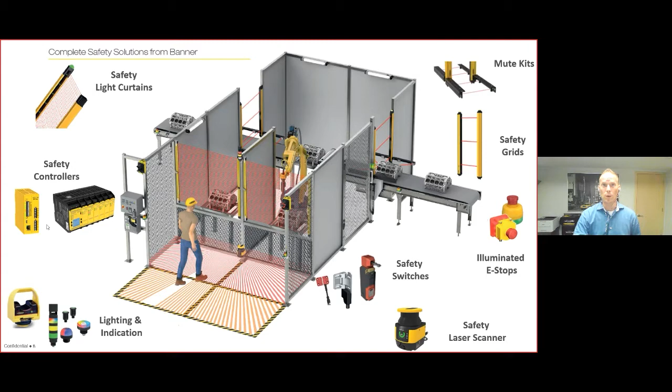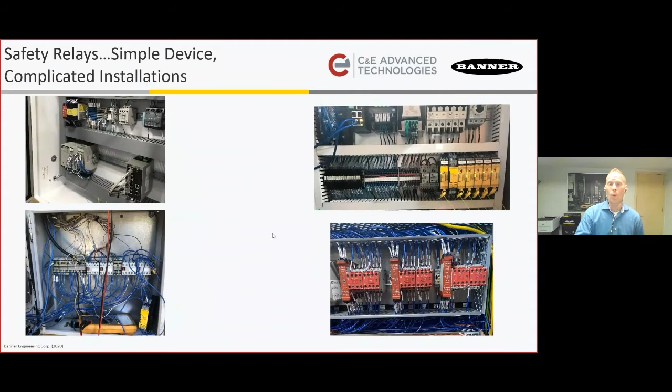So before jumping into ISD, when I was out doing research, I noticed something in the cabinet that was pretty apparent. There's a lot of relays used in different ways. You can see in some cases there's a lot of wiring. It's kind of a mess. You're using multiple relays with wiring, and in this case, lots of relays, contactors, and a significant wiring mess. And there weren't safety controllers in these applications. And I had to say, okay, why aren't we able to get in there and sell an expandable safety controller?

You know, Banner has been developing and manufacturing their own safety controllers for well over a decade. This is our second generation version, the XS26. It's a great product. I went out, talked to our customers, said, hey, what's your feedback on the XS26? What do you like? What don't you like? And overall, across the board, what they really love with this product is the PC software.

First of all, it's free. It's easy to use and learn. And actually later on in this presentation, we're gonna have Shane show you that. It's so easy that even a salesperson can do it, right, Shane?

So we'll go through that. It's flexible as well. So overall in this system, you can have up to 154 safe inputs, 64 safe outputs. So it's super flexible, and it's also smart. In this day and age, having a controller that can speak to the PLC, and we have the most common protocols, Ethernet IP, PROFINET, Modbus, is really important.

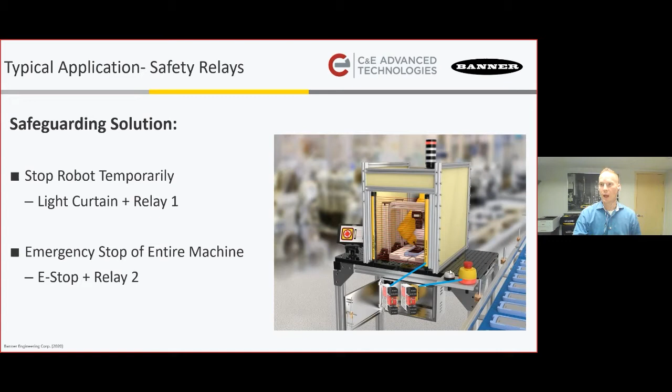So they love that. So then I said, okay, well, when I look over at your simple machines, I notice you're not using the XS26, and why is that? And when we looked at it, we said, hey, in this cell here, there's a robot, there's a light curtain that is here to stop the robot when somebody's hand is maybe adding material or removing material from the machine. And that's hooked up to a safety relay that's designed for light curtains. And then there's also an EStop, and it's connected to the second relay. And that second relay is going to basically stop the entire machine if something bad happens.

So then you ask the question, well, why didn't you use a safety controller? And the simple answer was, well, when I look at 2 safe relays, and this is list price, right? We're looking at $300 to $500. When you get into an expandable safety controller, the cost just didn't make sense.

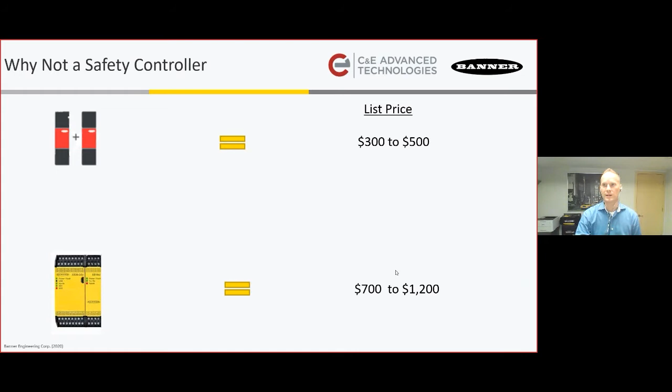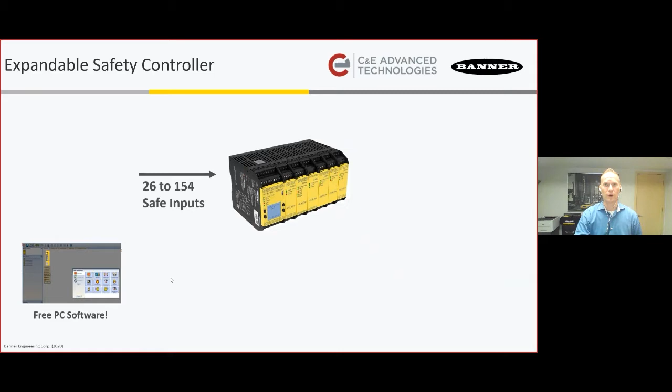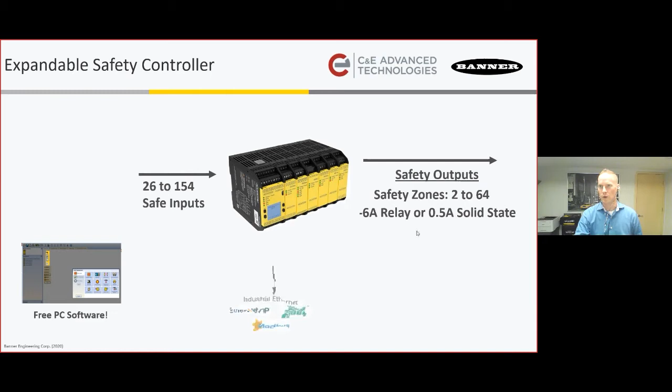So I brought that back to our team and said, hey, we learned people love our XS26, the free software. It's easy to use. They love that you have all these safe inputs. You can configure the safety outputs. There's a ton of safety zones. You got 6 amp relays, half amp. Actually, most people buy our 6 amp relay module, and they love this. But we need something that can fit in between.

Because I showed the team, looks like I clicked too many times here. So on one end of the spectrum, you have safety relays. And the way they're set up is they are built with fixed logic. And what I mean by that is, like in that last example, there's an EStop relay, and it has its own logic that works with EStops. And then we have another relay for the light curtain, which is a different relay that has its own logic and works with that type of device.

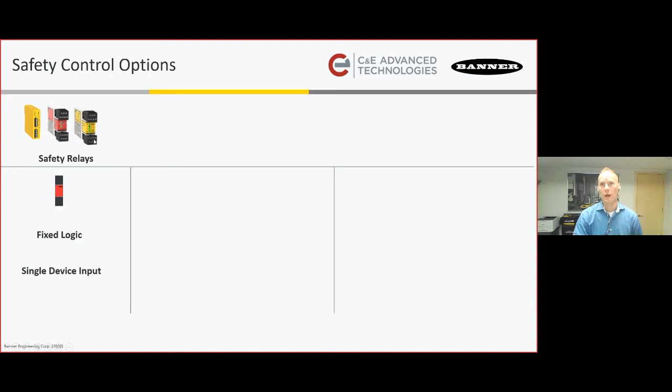And there's two-hand control relays and all that. So you got to pick the appropriate relay and also the function that you want it to do and stock that and use that. On the other end of the spectrum, you got expandable safety controllers. You can configure the logic, but really the price starts to make sense when you get to like 3 or 4 safety relays, when they start really adopting expandable controllers. And that's why we invented this product called the SC10. And this is a hybrid.

It's a safety controller, so all the cool stuff you get over here, but we built in 2 independent 6 amp safety relays. So we took 2 of these things, we stuck them in the right side of this box. So the top one here, safety zone 1, 6 amp relay. Bottom one here is a separate safety zone 6 amp relay. And you have 10 inputs that are configured with the same great software you get over here on a PC, and it has industrial Ethernet. So we made this thing smart, Industry 4.0.

Hey, John. Yeah. What's the rough size of that SC10 width-wise? It's the size of 2 standard safety relays. So it fits right in that same place as 2 standard safety relays. Great question.

So Yancey, you're paying attention too. This is great.

So the SC10, again, uses that free PC software. It has 10 inputs, and it's 2 safety zone outputs. Safety zone 1, 6 amp relay. It has 3 normally open sets of contacts. Safety zone 2 is a separate, independently controlled 6 amp relay with 3 normally open sets of contacts. It has industrial Ethernet that speaks the most common protocols: Ethernet IP for Allen Bradley, PROFINET for Siemens, and Modbus TCP for a whole host of other PLCs.

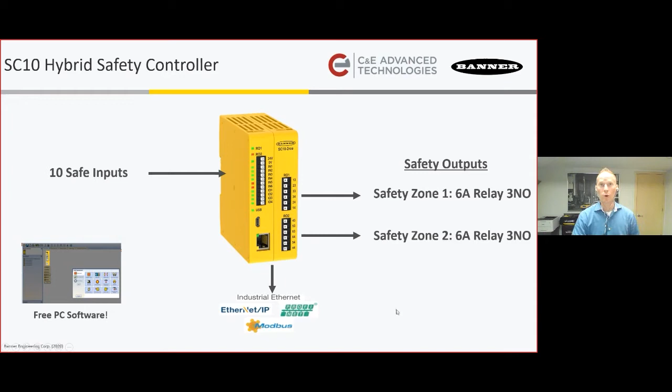Now, the other piece of feedback we heard in research was about relays. What they really love about them is they're very easy to set up, and when they need to be swapped out, you don't have to bring a PC out for that either. With a safety controller, the concern of a controls engineer was, hey, when I have to set up this machine, I'll have to drag out my PC to set it up. Or when it gets installed, I'm going to get a call at 3 a.m. from the maintenance worker saying, hey, I got to swap this thing out. How do I program it?

So I brought that back to the engineering team and said, how do we fix this? And what we did is, both of these controllers have memory built into them, but we made this thing called an XM3. It's a removable memory device that you can store the safety configuration and the passwords on. This is password protected, right? You don't want people going in a safety program and changing things. And also the network settings. Whenever it gets its final network settings, the SC10 will push that into this device.

So what's really cool about that is when you go to build your machine, you can stock one of these things, the SC10. You don't have to have 12 different types of relays for all your machines. You got one SC10, and then you can create a bunch of these XM3s with the part number, put it in stock, and you never have to go out as a controls engineer to the line and program again. The panel builder sticks it in, powers it up, boom. It has what it needs. It's ready to run. And you can actually leave this device in the SC10; it'll work through vibration and everything. We tested it.

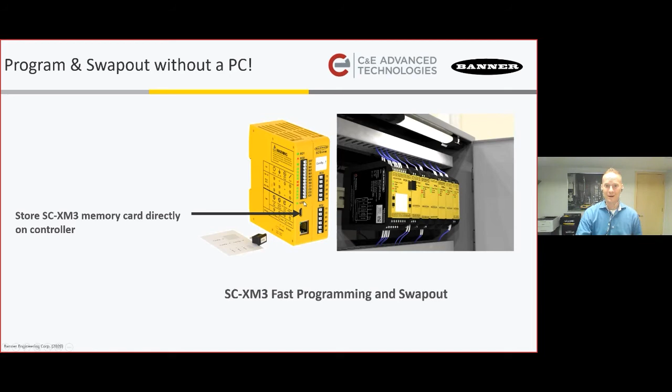So we developed this product, the SC10. We introduced this last year, and we went back out to the same customer and said, okay, here's what we can do now. Instead of those two safety relays, you can replace it with the SC10, same size. It's a 45 millimeter safety controller. For the light curtain, you can plug the light curtain into 2 inputs on the SC10. Again, you have 10, right? That is then mapped to safety zone 1, that first 6 amp relay. And then for the EStop, depending on how you're hooking it up, you got 3 to 4 inputs, and that goes to safety zone 2.

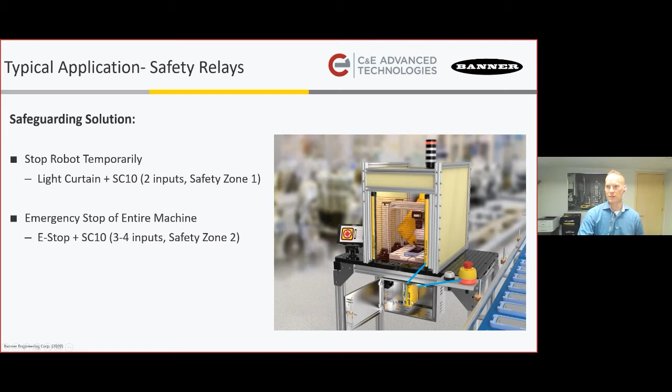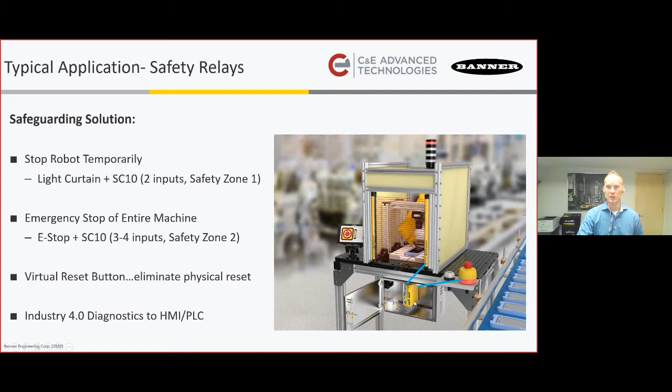And you still have other inputs available if you want to control the light on here, because you can actually turn these inputs to outputs to control lights. You can do a lot of other stuff with the available inputs. The other thing is you notice there's a button on this machine that they're using for the reset. Once an EStop is pressed and you rearm it, you've got to have another means of resetting that system. You can replace this physical button and do it from the touchscreen HMI with a virtual reset to the SC10, saving additional cost. And then also Industry 4.0, we got diagnostics to the HMI and PLC because this thing can speak the language of a PLC.

So when you look at the overall value that the SC10 delivers, it has a significant cost savings even on the simple machines, $150 per machine, and this doesn't take into account the wiring savings. If you're doing diagnostics, wiring can be quite a challenge, even on a simple system. And also the simplified inventory: you can use the same controller across all your machines and not have to stock all these different types of relays.

Now, when you go into a little more complex machine, in this case a case erector, here you have 2 light curtains: a light curtain on the input and a light curtain on the output. You've got a bunch of EStops and door switches. In this case, there's one hazard, inside the machine. If a light curtain is tripped when it shouldn't be, or if a door's open, the hazard in here will stop. So that's safety zone 1. And then you got EStops in case something bad happens you didn't expect. You press that, that's safety zone 2.

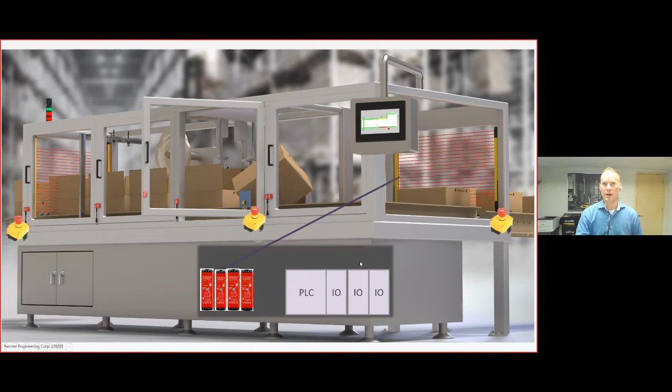Well, on a traditional system, that's going to require 4 safety relays. The reason for that is I need a relay for each light curtain, so the light curtain on the exit and the entry.

Because the EStop has its own safety zone, it needs its own relay. And all the door switches need their own relay as well. Now you also notice in this case, they've run wires home run from each device back to the panel. And the reason they're doing that, if you look up here on the HMI, is they're showing the status of each of the EStops and each of the doors.

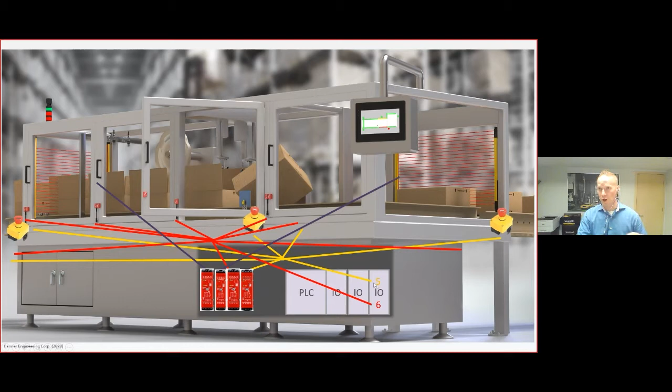And the way you do that is each device has their safety wires that go into the safety relay, but they also have auxiliary wires. And you can hook those auxiliary wires up to the I/O card on a PLC. So I got 5 EStops, all 5 auxiliary wires for each of those EStops go into 5 I/O here in the PLC. Same deal for the 6 door switches. And then the control engineer doing the programming for the PLC has to map the auxiliary inputs from the I/O card to the PLC to the HMI, and you get this cool experience. So that's kind of what's going on here.

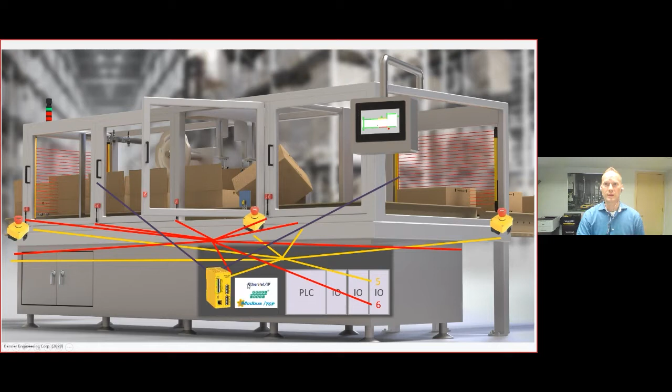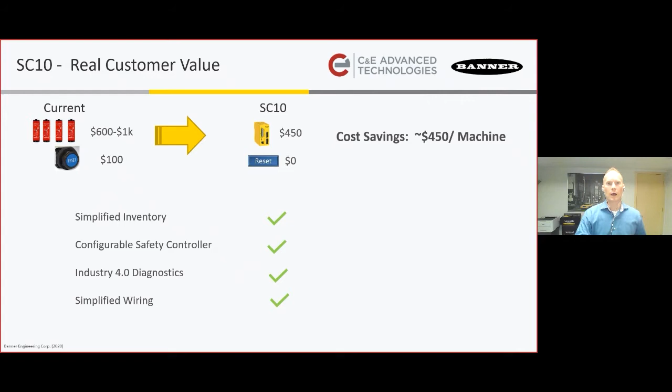With the SC10, we can drop all 4 of those relays, replace it with something half the size, save a lot of money, and also add Industry 4.0 diagnostics over EtherNet/IP, PROFINET, and Modbus. So there's a huge advantage just with the SC10 on this machine. And that advantage you'll see here. We're just replacing more relays compared to the previous example. So there's even more savings and better utilization of inventory. It has all the same advantages, just more money saved, less relays.

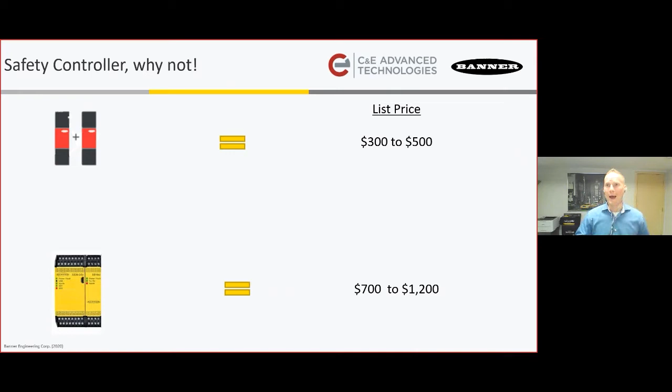So with the SC10, we went back and talked to these customers, said, safety controller now, why not? And really what they said is, I totally agree, because with this system, we have a list price on the SC10 at $450. So it's positioned where for most machines that are using 2 safety relays, there really isn't a reason to use relays again. This thing can replace all that, simplify your life, make changes a lot easier, and give you an Industry 4.0 diagnostic solution. And this has been just a game changer across the industry.

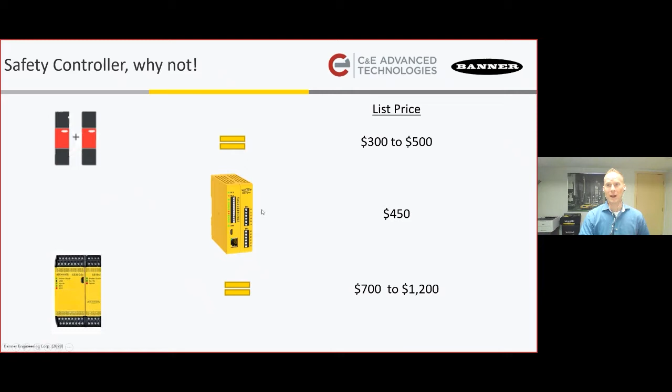So in those same discussions, we noticed the wiring, all those wires there. It's like, wow, that seems like an opportunity that we can help innovate and make that easier, because really what the customer wants is to know what EStop was pressed, what door was open, so they can reduce downtime, right? That's the whole purpose of this.

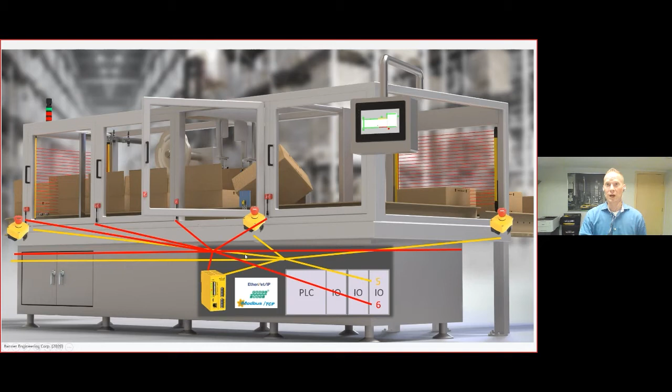But the challenge they have, and I talked to a number of machine builders, we'd be in the lobby waiting for the controls engineer, and he's troubleshooting this exact issue, wiring. All these wires going back, trying to figure out why on the screen, when I press this EStop, that one's turning on. Well, I got it hooked up in the wrong spot. That can waste hours, days. Sometimes, if they have a lot of doors, that can be weeks. And that can delay shipping on a machine. So let's look into this and figure out how we can fix it.

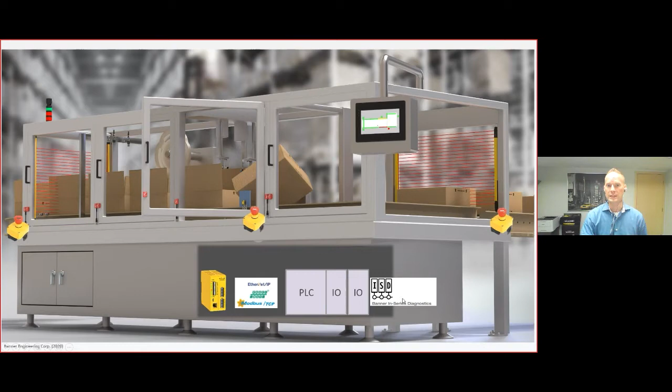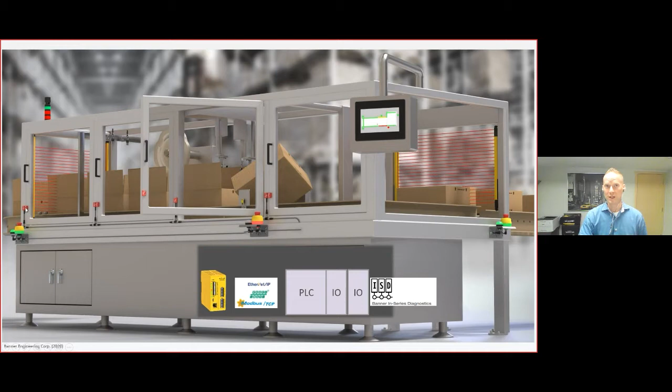So we have a solution now with in-series diagnostics that'll clean up that wiring mess. It'll also eliminate an I/O card in the PLC, or multiple if you have a lot of doors. And we're doing that with this feature called Banner's in-series diagnostics, or ISD. The way this works is we have Banner devices with this diagnostic protocol built into them, and they speak to the SC10 and directly to the PLC.

So for all the door switches, you simply connect them, if you're looking at my video, with this simple T connector. 4-pin cables connect to it to connect each device. There's nothing special about the cables. We have great cables, but nothing special about them. 4-pin cables connect the T connectors together. 2 of those 4 pins go into the SC10, and the other 2 go to power. You can have up to 32 doors on this chain. In this case, they have 6.

The EStops, starting in about a month, will also have ISD built into them. So you can do the same thing. That same T connector connects to the EStop, 4-pin cables connect all the EStops back into 2 additional inputs on the SC10. The other 2 go to power. And all this information that you get up here, we just send over either Ethernet IP, PROFINET, or Modbus to the PLC. You don't have to go in and configure all this stuff. And we even made that setup really easy. I'll talk about that a little bit more.

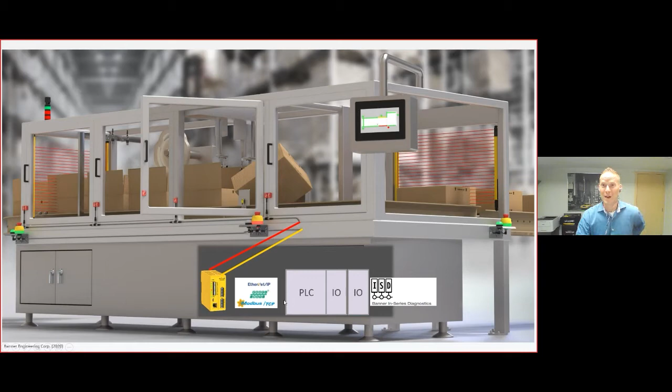So when you get down to this system, now we can even drop an I/O card, so there's additional savings. What's not on here in the cost savings is the wiring. That's a big deal. That's going to save a lot of cost, a lot of time troubleshooting, get more machines out the door.

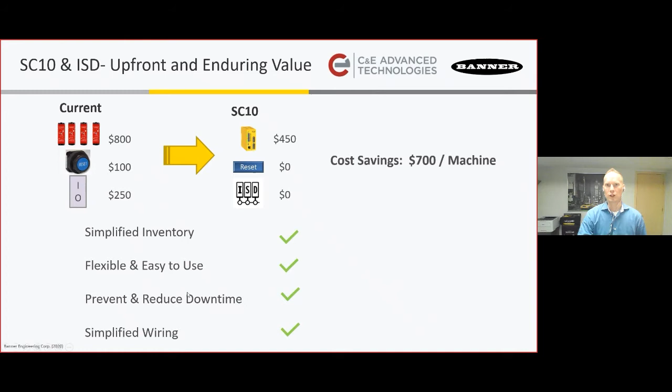The other thing I didn't mention, so we can reduce downtime. We tell you what device is pressed, where it's located, preventing downtime. There's no one else that can do this on the market, and with ISD now you can. And what I mean by that is we can send an alert to let the maintenance person know that they need to go and adjust something before you have downtime. And I'll show you what that means here in a second. But this is really a game changer.

And really, simply put, what's going on here is these devices, the RFID door switches and the illuminated EStops, have this protocol ISD built into them. They speak to the SC10. It does all the hard work and then makes it very easy for the PLC and HMI to understand what's going on with the system.

Hey, John. Yeah. I don't know if in your live demo you're going to show, but another thing, prior to ISD, our illuminated push buttons were a great indicator of which push button was mashed as well. So that may be a good point to bring up to the audience. Yeah, so you're talking about the current illuminated EStops? Yes. When they're in series without programming them, they're all, say, a steady yellow. When one's mashed, the one that's mashed is a flashing red. The others are steady red. Absolutely, yeah. We'll show that in the demo. I think I have a slide here that'll show that exact thing.

So that's exactly it. And Nancy, I get so excited about ISD, I forget about the local diagnostics that you get with this thing. But yeah, when these things are connected together in series, the device pressed will flash red. So you can locally see what's going on. And then on the HMI, even before you have to go do that, the HMI is going to show you where it is, what it is, and then you can quickly get to that spot on the machine, figure out what happened, and get that machine back up and running. That's a very, very good point.

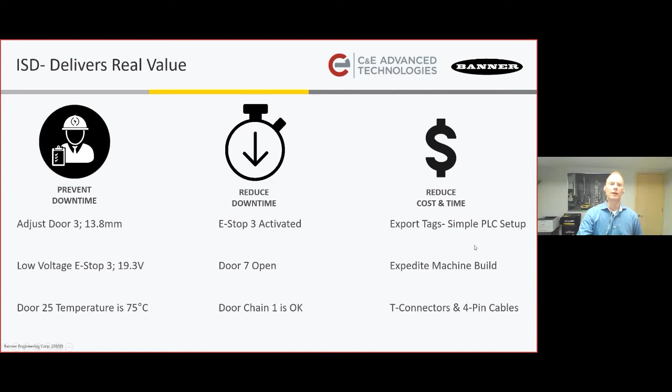Reducing cost and time. We already talked about the T connectors and 4-pin cables. That's a substantial savings. Expediting the machine build, no longer having to deal with all the wires. But when we show this to controls engineers, they say, yeah, that's cool, but how do I get all the tags set up? That's going to be a lot of work. Well, we have a solution for that as well, and we'll show you what that looks like when Shane goes through his demo. Shane's got this thing; he's going to knock it out of the park.

And again, it's a sales guy, right?

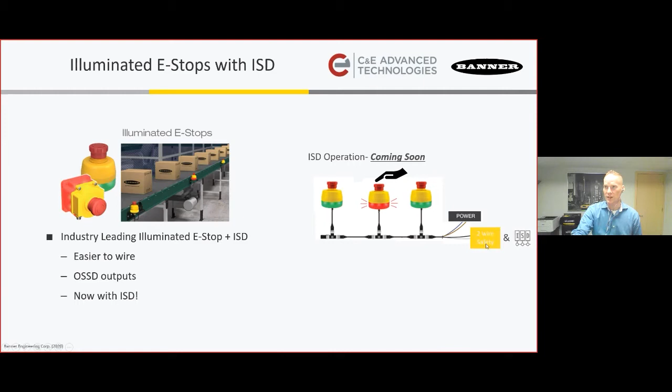And the way that works, and here's my terrible animation, is if I press this one in the middle, it's going to flash red. And in this case, the customer's using green to indicate it's armed, right? So you can locally see what's going on with a flashing red. You know that the other ones are powered or good to go. And it's only 4 wires. Power goes to the system over 2, and then these are OSSD outputs, just like a light curtain. Highest level of safety, goes over 2 wires into the SC10 for safety and this ISD diagnostic message.

So in a system, and I show this isn't really a typical way that you hook these things up, but I show this on purpose. We can get up to 64 ISD devices into an SC10. You think about that, a $450 list price product can have 64 ISD devices hooked up to it, and it still has 6 additional inputs available for other stuff. I mean, that's the most densely populated controller on the market.

And the way that this works is you have 2 separate safety zones, or ISD chains. Each chain can have up to 32 devices, and you can mix and match EStops and RFID switches if you'd like. In the example I showed before, you're more than likely going to have a chain of all EStops and all RFID door switches. And the reason for that is the way that the ISD works is you're daisy chaining devices together. It's like cascading light curtains.

So the OSSDs from this one go into that one. And if that one is not okay, it's going to tell the rest of the chain to turn off. So the OSSDs for the entire chain will be off if any one device is off. Now, ISD tells you where that issue is so you can quickly address it, or it alerts you when there's something that may cause an issue so you can address that and prevent downtime.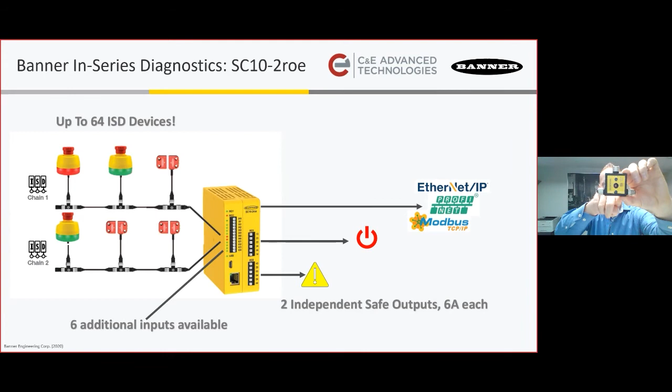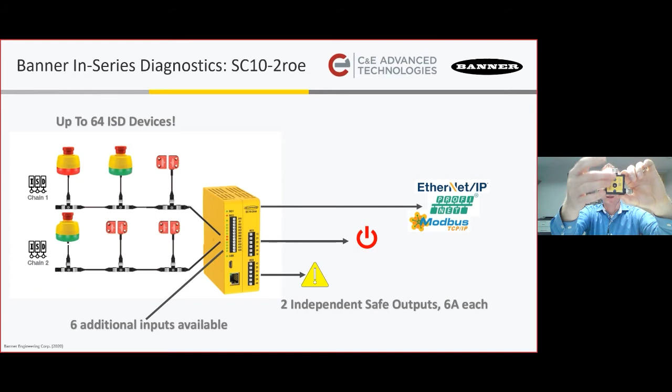What you can do with it is hook up 2 sets of normally closed dry contacts into the input of it. So an example of that would be a panel mounted EStop or a mechanical switch. It goes into here. And then this device turns it into OSSD outputs to add it to the chain. So you get the highest level of safety. It self-checks, does all that fun stuff. And it gives you the diagnostic status over the ISD chain. So you will, at the end of this year, have another option. And you'll see in the demo, it has some lights that turn on and off to tell you what's going on. It's a really cool system.

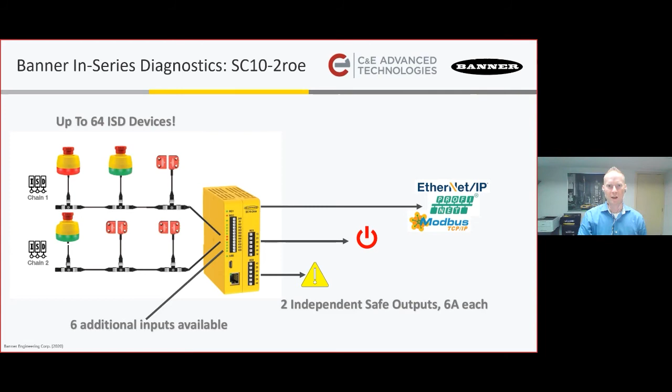All right, so I'll show another bigger view of that in the demo of that feature, in case my video isn't all that large for you to see.

Now this is how a system's constructed. It's really simple. You start out with the termination plug. All it does is it runs 24 volts into the first device, and then it's T connectors that connect the devices, 4-pin cables between devices, and 2 pins go to the SC10, 2 go to power.

Now we also have devices that allow for a local reset. So if you want to have a reset button wired in here, you can do that. Same goes for the EStop. But really, this is the most typical way to hook it up. You've got a termination plug, T connectors, 4-pin cables, and land them back to the SC10.

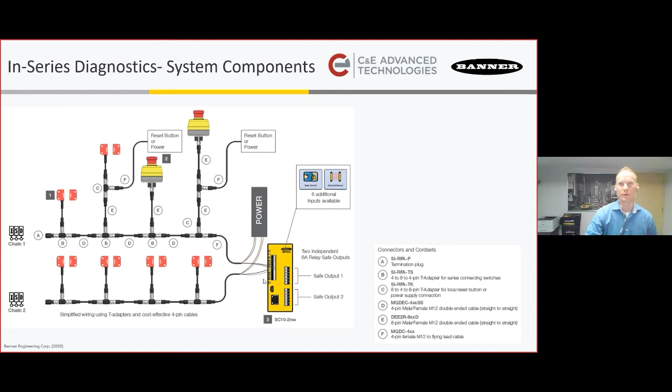Now, a question that will also come up is, how many devices, how long of a cable run can I have? Because obviously, you run into challenges with power. Well, what's really neat about this system is the only limitations that we have are 32 devices per chain. I think I said that a few times, right? But it's 32 devices, and there's like a 30 meter limit between here and here, but that's very unlikely to see, right? Other than that, there's no cable restriction.

All you do is you add power where you need to in the chain. And with ISD, it'll tell you where. So when I hook up all these devices, they wouldn't really do this in this view of devices, but what you'd be able to do is you can either add power to replace the termination plug, or you grab a T connector and you add power somewhere in the chain, and ISD will tell you where. Really cool.

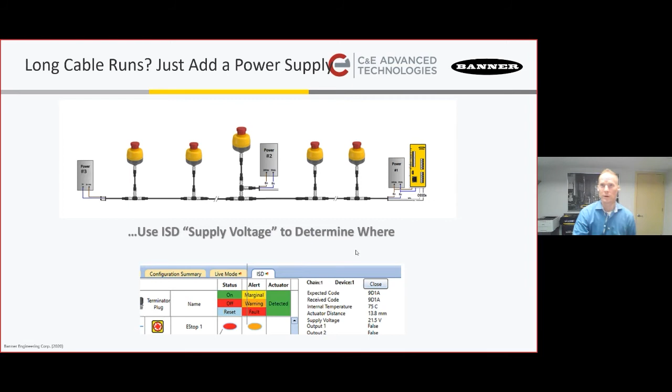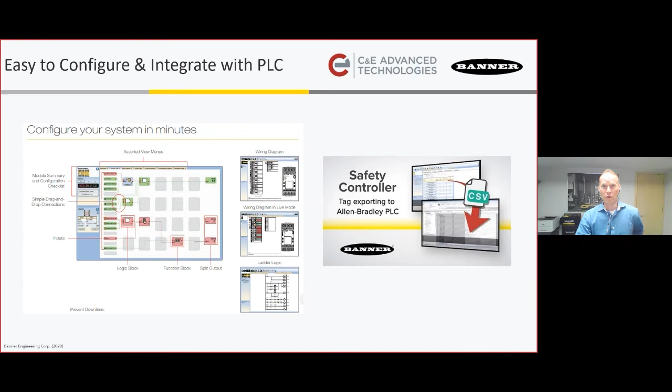And then as far as the system, it has a very simple user interface, and Shane's gonna knock your socks off with this demo, right? It's gonna be amazing. And then we also have this export tag feature. So with that, I'm gonna switch over to a software demo.

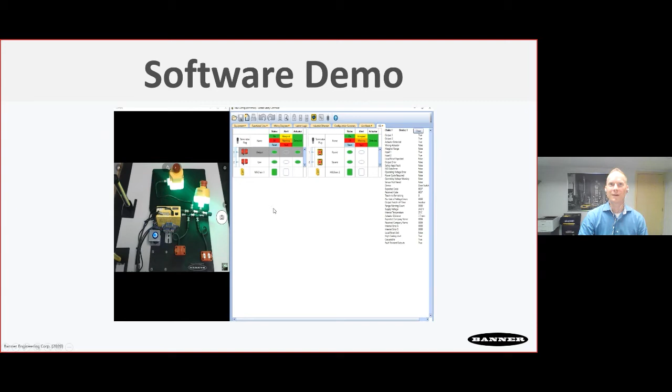Unless Yancey, you had any other questions you wanted to pop in while I'm doing this quick transition. I'll take that as a no. All right. Sorry, my mute button disappeared on me, but no, there's no questions right now. We're good. All right, great.

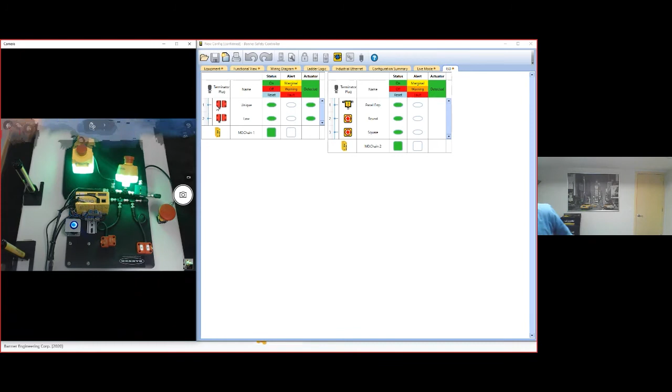In this first chain, like you see up on the screen, we have two RFID door switches. Door switch 1 and door switch 2. It's connected with a termination plug, T connectors, and a 4-pin cable. 2 wires go into the SC10. Over here on chain number 2, I'm gonna do a close up. We'll see how this blows up.

Right, so this is a prototype with a handmade label. This is what I got from engineering to do this, but it's a little sneak peek into the future, right? So this is the standard T connector you hook up to ISD devices. This is the ISD connector we were talking about earlier. I've got a prototype down here that's hooked to this panel mounted EStop. Okay, so that's device 1. You got the termination plug that goes into it.

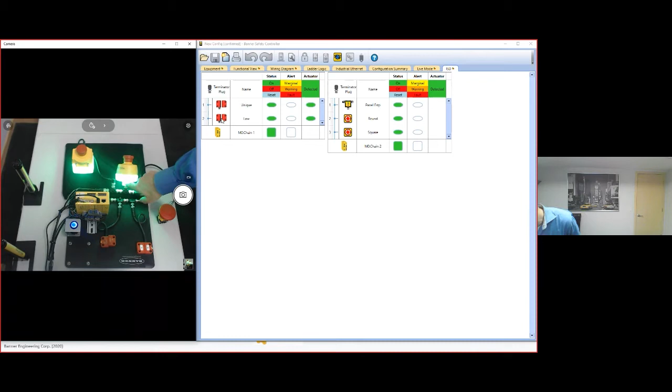Then I've got two illuminated EStops, because we sell this in a 30 millimeter round, so you can put a 30 millimeter hole in your panel, drop this thing in, hook it up. We have brackets and stuff too. Or you can do a flush mount design where this thing just mounts right to the machine. There's 4 holes for it. Now, if there is a need on our round, we have a wash down cover as well that you simply add over the top of the device and you can spray away, clean it up.

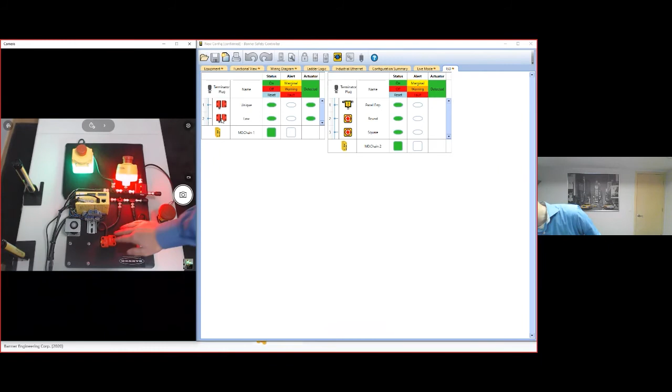It's all good. So the way the system works, you watch kind of both the screen and the video. It's going to tell you when a device is pressed, if a door is open, and that gets sent. You'll see here I've got this round EStop pressed. The OSSDs are off for that system. Over here, chain 1 is also off because that door is open.

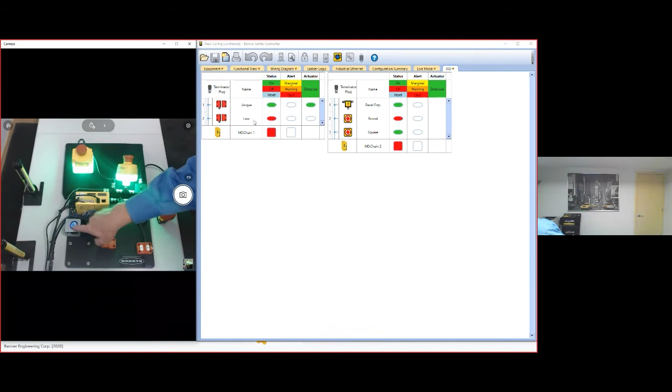Now I mentioned you also have, and I can go and remove my reset. In this case, I'm doing a hardwired reset. We're turning the light on and off on the SC10. It's a pretty cool system. But here, the other thing I mentioned is that we have the ability to prevent downtime, and with the unique door switch, I'm going to put this here out to.

So with our unique door switch, what it's going to tell you is that it's in this marginal range. So the OSSDs are on. That means everything safety-wise, it's like, hey, keep running, everything's good. But you're going to send an alert to the PLC, the SC10 will say, hey, go check out door 1. And then the PLC can say, okay, great. Hey, door 1, tell me what's going on.

And on door 1, it'll say, look at this. I'm at 14 millimeters. I can tell you that 13.8, 14 millimeters, right? So then it can also tell you the voltage level, 24.2 volts. It'll tell you the temperature. And then the other thing you'll see, it'll even tell you the actuator code.

And now where this is really cool, so on the uniquely coded one, this one's expecting to see the 8E37, and it sees that, and it's great, right? So uniquely coded, that means you train the sensor to only recognize that actuator. Each RFID code from Banner has a unique identifier in it, right? So the uniquely coded, you train it, boom, it's the only one that it'll use.

Now we also have a low coded sensor. So I'm going to show you that one because what you can do with ISD data that's pretty unique is that for this low coded, it's expected code. This it says 1, 2, 3, 4. It'll take anything. It doesn't care. So as long as it's a Banner RFID actuator. So this one right now sees ACEB.

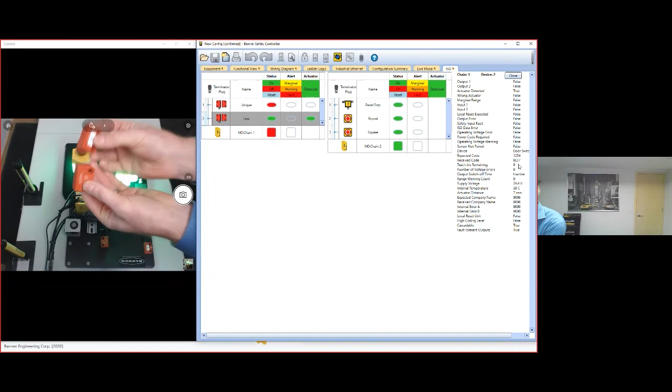Maybe I have an application where, from a process standpoint, I want to know what tool is in the machine. I can do that. So I add the tool in, I see it's the right one with my low-coded sensor. Then on that same chain, I've got the safety guard that I uniquely coded because I don't want people tampering with it, right? And all that goes back over the same two wires.

So I can get process data from the low-coded to make sure it's the right tool to run so it doesn't damage the machine. And then for the other one, I can have safety. I can hook EStops to it. I can hook whatever I want, up to 32 things. So that's a really powerful use of the system.

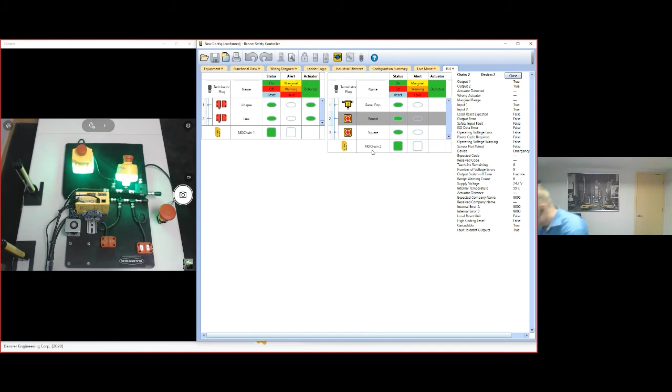Now for the EStops in particular, I mentioned the voltage. In this case, my voltage is great. I got short cable runs and a power supply that's hooked right up to it. But anyways, it'll tell you the voltage level. But now for troubleshooting, if somebody forgot, and this has happened even in some of our earlier tests, someone forgot to put the termination plug into the system. Well, this could be buried in the machine.

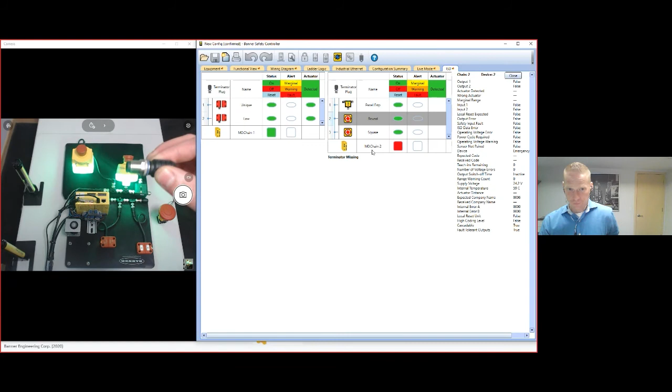And this could either be when you're doing the initial build, or when the machine goes out to the customer, and someone gets smart, maybe they watch an ISD presentation by me or something, they figure out I can take this thing out and I go on break. Well, you can quickly identify that on the HMI because you see on the screen terminator missing. And we actually have a bunch of info in this system to tell you what's going on.

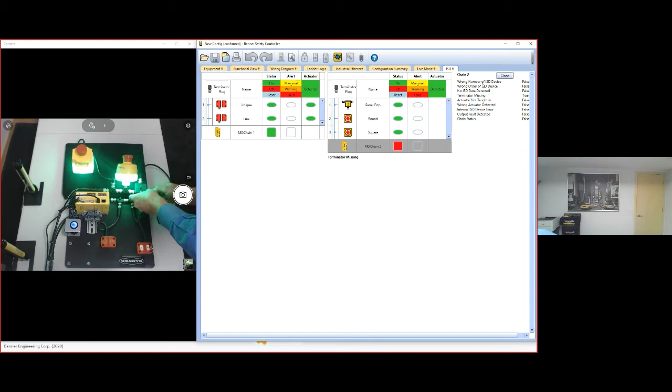So you can have the wrong number of ISD devices where that's important. Think about somebody not only trying to go on break, but let's say one of the doors in the system, they're like, that's slowing me down. So I'm going to take that door out of the chain and reconnect things. Well, it'll send an alert to the PLC saying I got the wrong number of devices, wrong order, since you can do EStops and RFID door switches in the same thing, or this ISD connect. If it didn't match what you said, it'll tell you.

And it has a bunch of other information like wrong actuator, not taught. If you get unique or high coded sensors, it'll let you know if the actuator wasn't taught and where it is.

And the whole idea here is getting machines out quicker and reducing downtime, even preventing downtime. That's what you get overall with ISD.

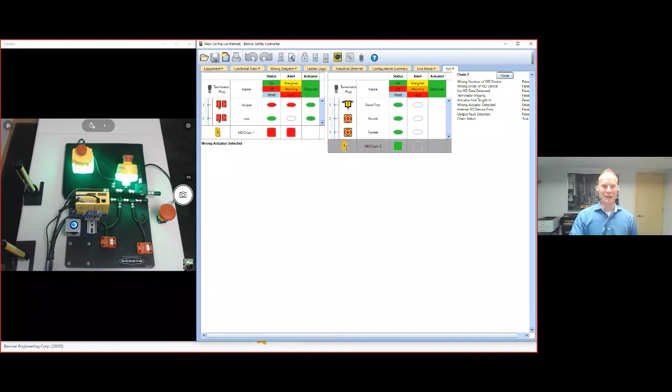So before I switch over to Shane and show the sales example of how to actually set up the system, any questions, Yancey, you want to pop in before we do that changeover? No, we are good on questions, and yeah, we're at the 10:35, 10:38 mark, so I think we're good. All right, cool. So with that, Shane, you are up.

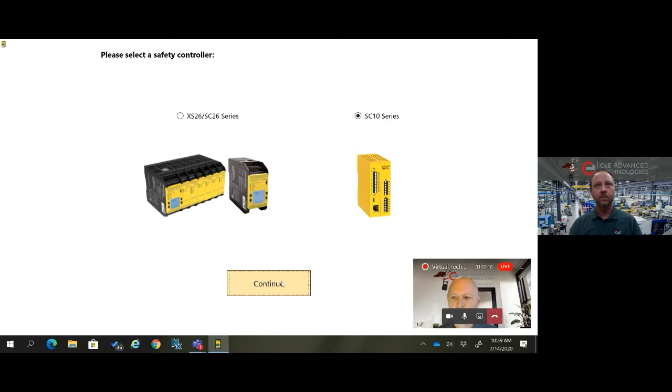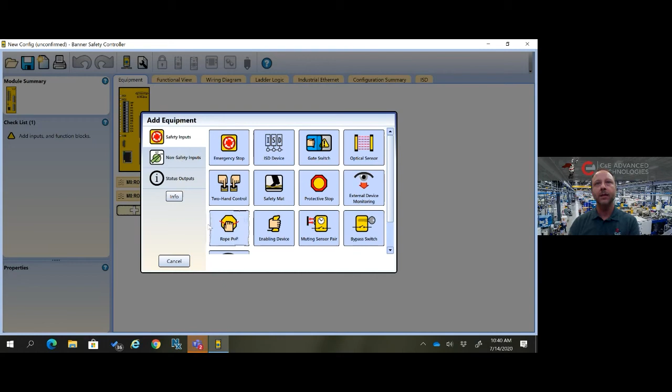And you can start by adding your safety devices. You'll see a number of tabs up here across the top, some of which we'll be discussing here today. You can add your safety devices from either the equipment or functional views. So we're going to go ahead and do that from the equipment view, by just hitting this plus sign here. That'll give us all the safety device options and the non-safety inputs, status outputs that are available for use with the circuit.

So we're going to set up an EStop that turns off both zones and then won't allow them to open back up until a manual reset function is performed. And for that, we're going to use a string of ISD EStops. Best practice is to name these. Select 3 devices, make sure they're all EStops. Provide a name for each.

With your ISD strings, they're automatically allocated to either terminals 3 and 4 or 5 and 6. And like John said, you can have up to 32 devices on each string. So for this case, we're going to select 3 and 4. Now you'll see our EStops are populated here and over here in the functional view. So then we'll just start adding the rest of our devices.

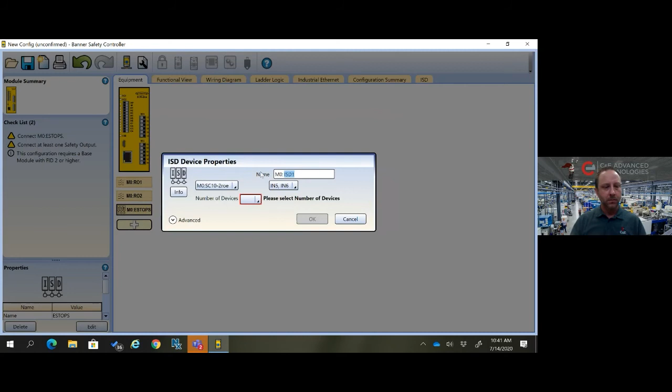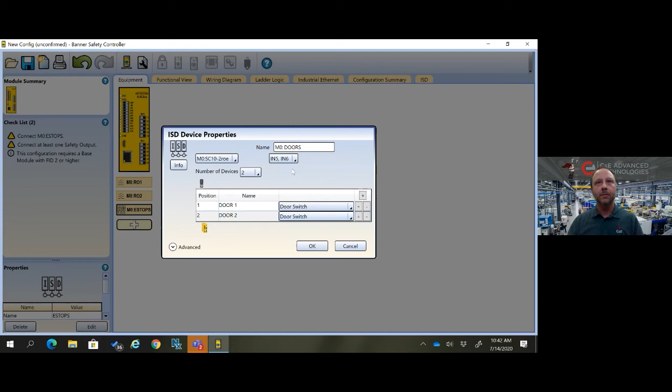For safety zone 1, we'll add a set of 2 ISD door switches. Doors, select the number of devices, door switch. You'll see there, like I mentioned, with 3 and 4 being taken by our EStop string, terminals 5 and 6 are the only ones available. So we'll hit OK.

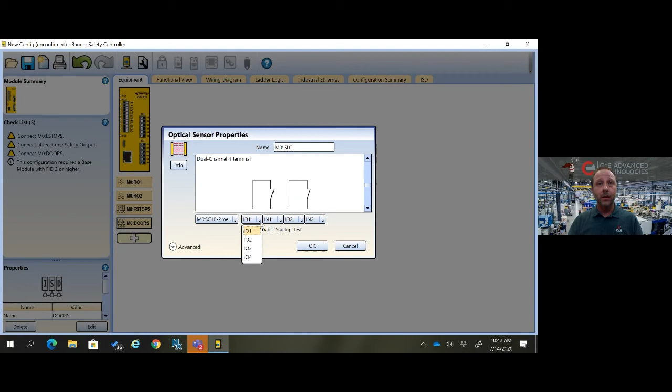For safety zone 2, we're going to add a pair of EZ-SCREEN LS safety light curtains. We'll name those as well. You can see here the various options that you could wire up the light curtains and the associated terminals that are allocated for such. If you were to click, you can manually select the terminals, or they will be automatically allocated based on what's available. So we'll stick with dual channel PNP for this.

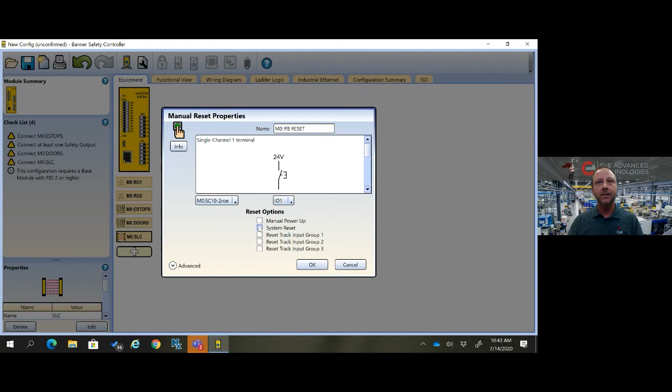And then lastly, we're going to add a non-safe input as a manual reset button. And this is going to be set up as an EStop reset, but we're also going to set this up as a controller reset. So when you cycle power to the controller for downloading programs, that can be done just by clicking the system reset button here. And now we've got all of our devices loaded.

And so you can see here in the functional view that those are all loaded up, and we'll move these around to make a little bit more sense for our circuit. Pull this guy down here.

So now we'll start adding the logic portion of our circuit. And you can see there on the left-hand side, there's a checklist that shows you what needs to happen before this configuration would be valid. When you connect everything, you'll get a green light over here that lets you know that your configuration is ready to be downloaded to the controller, wired and deployed. So we'll start adding our logic.

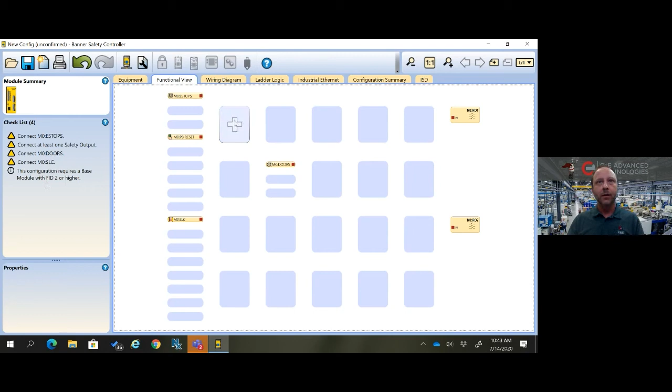We're going to start by setting up a latch reset block for our EStops. And we'll pull the EStop into here and the manual push button for the latch reset. And then we'll add a couple AND blocks for our safety zones. And these will be our zone enable blocks. Call this zone 2 enable. And then we'll assign the devices to those blocks. We'll pull the EStops into both.

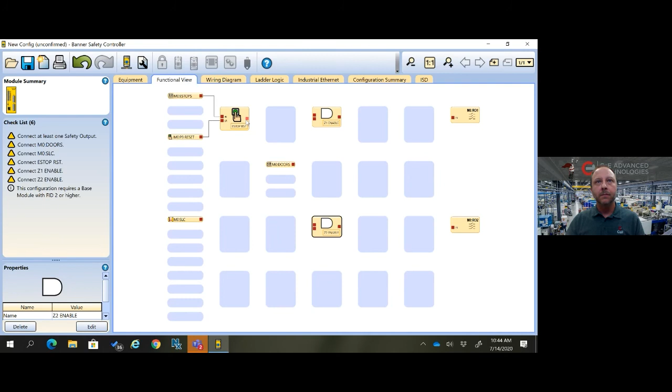The doors into zone 1, the safety light curtains into zone 2, and we'll take the output side of those blocks into our safety relays. Whoops, there we go. Come over here and name these, zone 1 and zone 2, and then we'll be ready to simulate.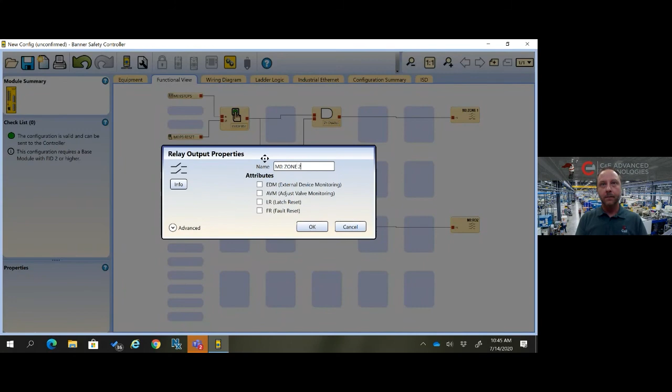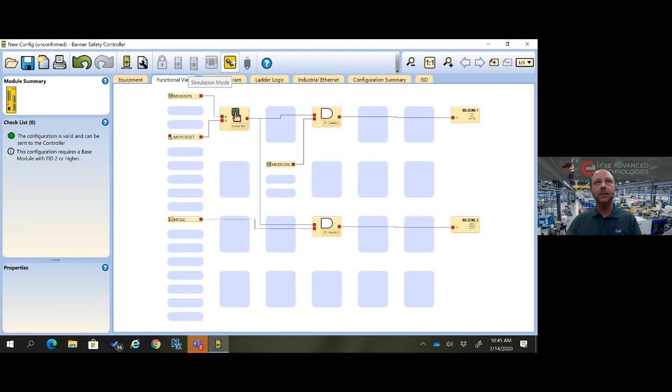You can see over here on the left-hand side now our checklist. We've got the green light that the configuration is valid, can be downloaded to the controller. But for the sake of our demo today, we're going to go into simulation mode. So you can do so by clicking this gear icon at the top, hitting the play button. We'll go through and reset, clear all the devices. So now you can see that both zones are cleared and enabled.

If someone were to come along and open up one of the door switches on the ISD string, you'll see that zone 1 drops out. Once those doors are shut, that zone will be clear again. Same goes for the safety light curtain. Somebody breaks the light curtain, you lose zone 2, light curtain's cleared, zone 2 is enabled again.

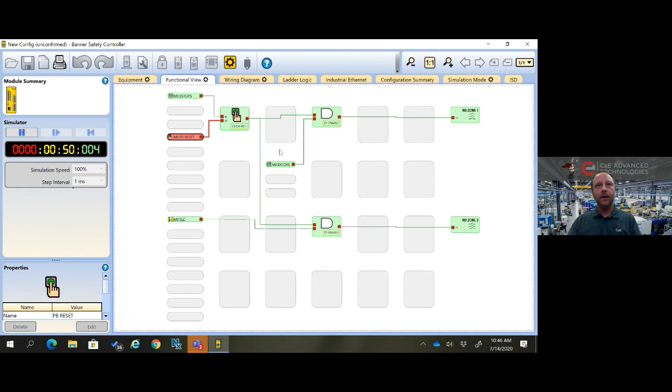And then if one of the three E-Stops that we set up in the ISD string is mashed, you'll see that that drops off power to both zones, and that can only be reset when the E-Stop is cleared and the manual reset function is performed. So you can see that's a pretty straightforward and common safety circuit, and we were able to set it up in a matter of minutes, prove it out, and now this would be ready to be deployed and downloaded to your controller.

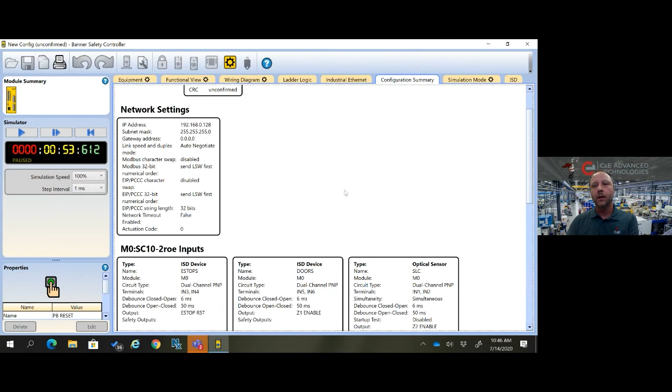I mentioned some of the other tabs at the top. A really nice feature in the wiring diagram, as you select your devices and those terminals are allocated for each device, this will show you where they land on the controller. The configuration summary is a text-based configuration for each device and block, along with the associated information for each. Best practice is to print this out and keep it in the safety office in case you lose a controller or program and you don't have it backed up.

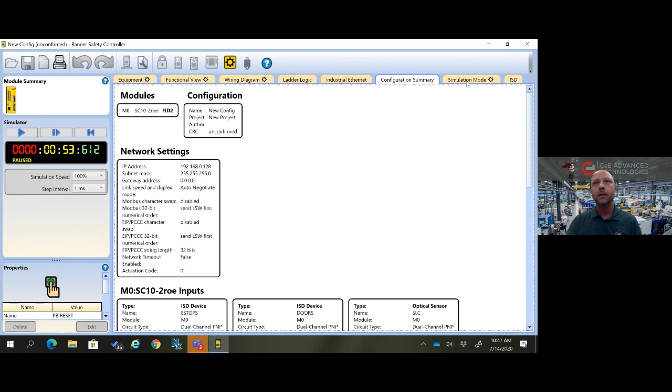That being said, John made reference to the XM3 external memory drive, which would be valuable for backing up your program, and also if you have multiple machines that are identical. And lastly, if we jump over to the Industrial Ethernet tab, this is a multi-protocol Ethernet device interface set up on the SC10. So if we were working within a Profinet network, do an auto configure, and you'll see everything is formatted, and now this is ready for the export function to export these as PLC tags.

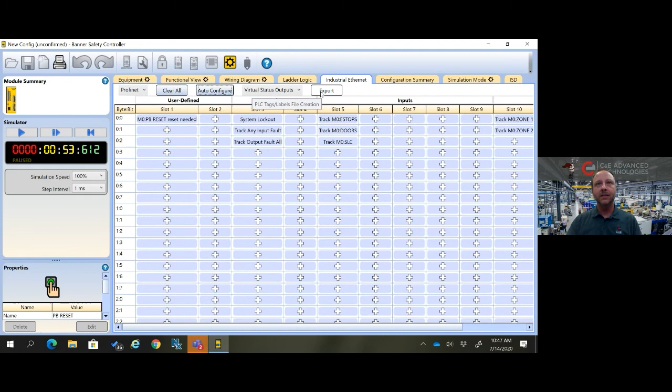Same would go if you were working within an EtherNet/IP system. The structure is a little bit different, but all the information, along with how we named our devices, is populated and can then be exported out as tags to your PLC.

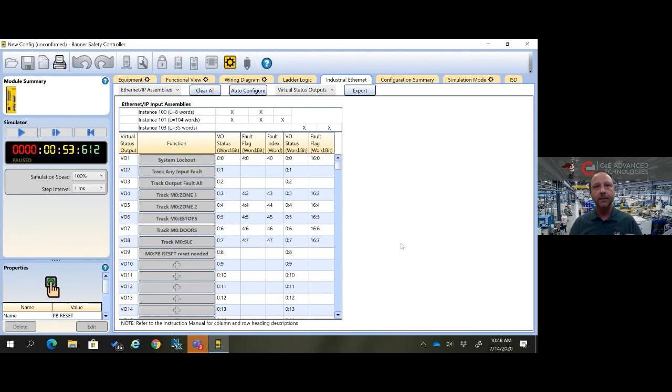Yeah, all I gotta say is this is why I'm not a technology consultant, because I don't think I could have done that demo. But hey, we did have one question come up right at the end of John's and the beginning of Shane's, which was, is PROFIsafe in the near future as well?

Yeah, so PROFIsafe and other protocols we're looking into. Currently, it's not a 2020 plan. With our ability to do local safety zone control with the two outputs, and also communicate with a Siemens PLC, we're able to provide a lot of value very inexpensively. But we're obviously continuing to innovate, and the innovations you saw over this presentation that have happened over the last year have been pretty profound, and we'll continue to do that in the future.